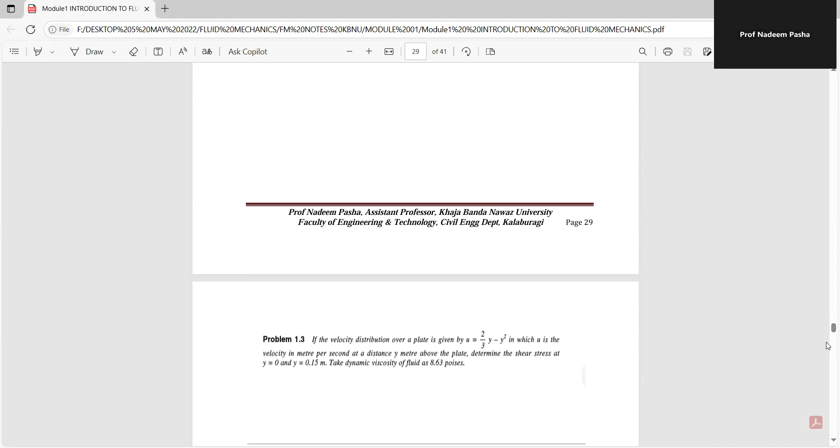The first problem is on Newton's law of viscosity. The velocity distribution over a plate is given by u equals 2/3 y minus y square, where u is the velocity in meter per second at a distance y meter above the plate. Determine the shear stress at y equal to 0 and y equal to 0.15 meter. Take dynamic viscosity of fluid as 8.63 poise.

So we are assuming the velocity distribution over a plate is given by u equals 2/3 y minus y square, where u is the velocity in meter per second at a distance y above the plate. We need to calculate the shear stress at y equal to 0 and y equal to 0.15 meter, taking dynamic viscosity of fluid as 8.63 poise.

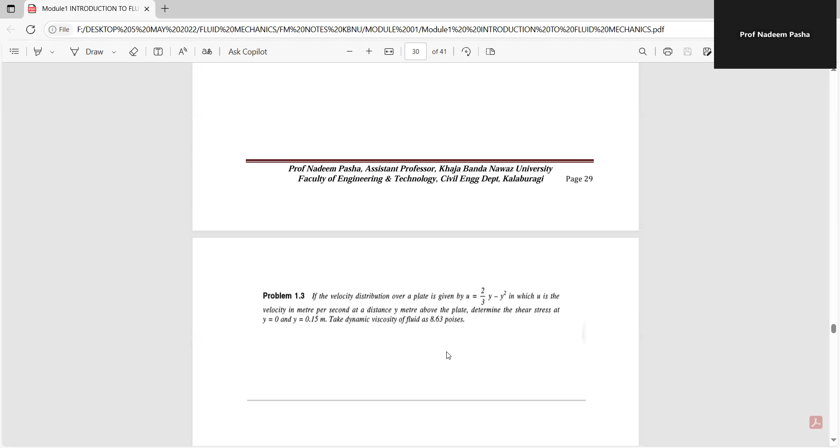So u equals 2/3 y minus y square. We need to differentiate this with respect to y. So du/dy equals 2/3 minus 2y, since differentiation of y is 1 and differentiation of y square is 2y. At y equal to 0, substituting 2/3 minus 2y as 0, it comes out to be 2/3 or 0.667.

In the second case, we calculate du/dy at y equal to 0.15 meter. 2/3 minus 2 into 0.15 comes out to be 0.367.

Now value of mu is given as 8.63 poise. To convert this to Newton second per meter square, multiply by 0.1, or divide by 10. So it comes out to be 0.863 Newton second per meter square.

Now the shear stress equation as per Newton's law of viscosity: shear stress acting on the fluid element is directly proportional to rate of change of shear strain. So tau equals mu into du/dy. In the first case, shear stress at y equal to 0 is given by tau-0 equals mu times du/dy at y equal to 0.

Mu is 0.863, and du/dy at y equal to 0 was calculated as 0.667. So the answer comes out to be 0.5756 Newton per meter square.

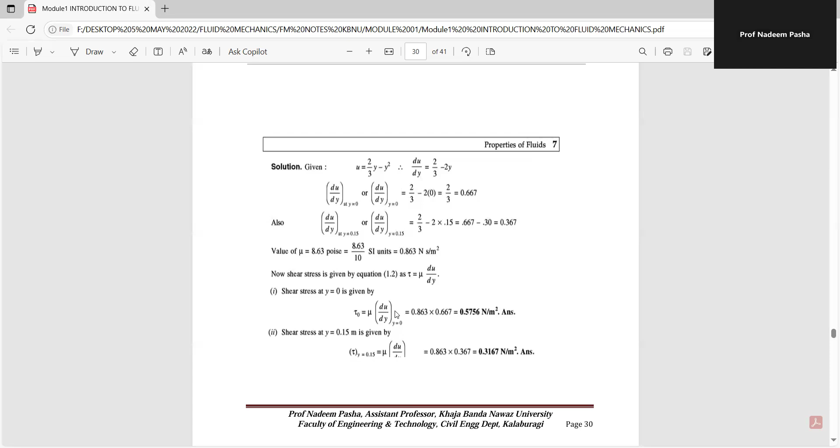One more problem: a plate 0.025 mm distant from a fixed plate moves at 60 centimeter per second and requires a force of 2 Newton per unit area, that is 2 Newton per meter square, to maintain this speed. Determine the fluid viscosity between the plates.

What is given to us? Distance between the plates, dy, is given as 0.025 mm. Velocity of the upper plate, U, required to move the plate is 60 centimeter per second, which converted to meter per second comes out to 0.6 meter per second. Now force on the upper plate is 2 Newton per meter square, which is the value of shear stress.

Now what we need to calculate is viscosity. So let the fluid viscosity between the plates be mu. Using the equation of Newton's law of viscosity, 2 equals mu into du/dy, where du equals change in velocity, u minus 0. Here the velocity is not changing, so du comes out to be 0.6 meter per second only. Similarly, dy is equal to change in distance.

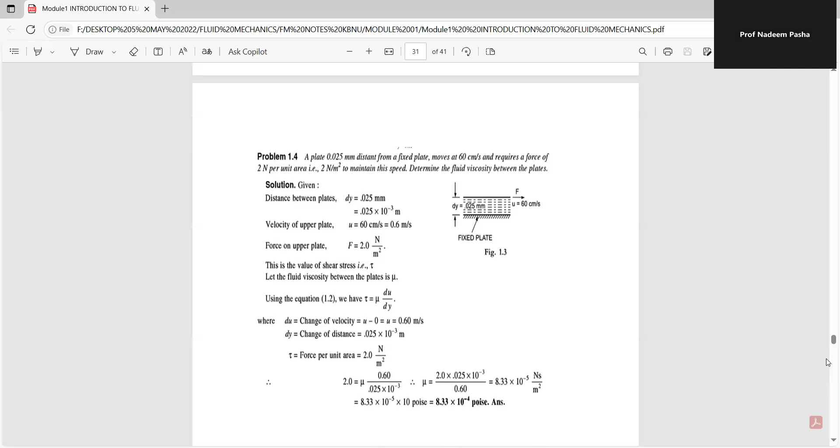So if you want to convert this into poise, it will be 8.33 into 10 raised to minus 4 poise.

So one more problem. Determine the specific gravity of a fluid having viscosity 0.05 poise and kinematic viscosity 0.035 Stokes. This is a somewhat new type of problem in which two types of viscosity is given: dynamic viscosity and kinematic viscosity. You need to calculate specific gravity.

Viscosity mu is equal to 0.05 poise, so it comes out to be 0.05 divided by 10 Newton second per meter square. Kinematic viscosity V is given as 0.035 Stokes. To convert this into meter square per second, multiply by 10 raised to minus 4. So kinematic viscosity comes out to be 0.035 into 10 raised to minus 4 meter square per second.

Now we have the relation V is equal to mu by rho. So V, the kinematic viscosity, is 0.035 into 10 raised to minus 4, equal to mu, 0.05 divided by 10, into 1 by rho. So your rho comes out to be 1428.5 kg per meter cube. This is a very interesting type of problem in which both types of viscosity are given, with the help of which you calculate the density and finally the specific gravity of liquid.

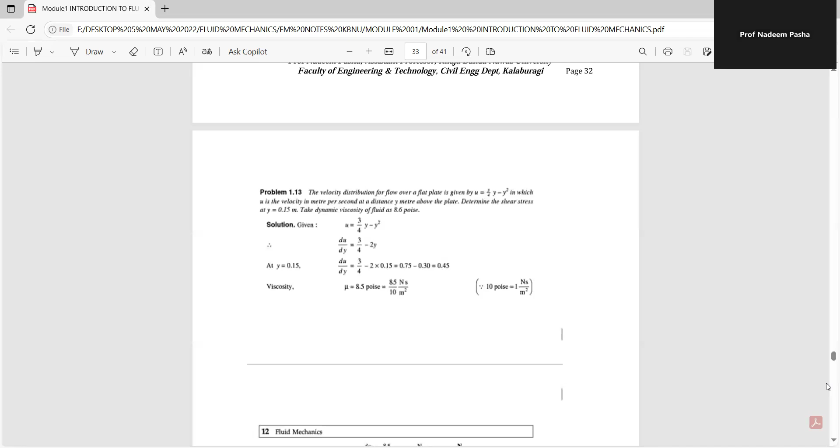Du by dy is equal to 3 by 4 minus 2y, since differentiation of y is 1 and differentiation of y square is 2y. At y equal to 0.15, du by dy equals 3 by 4 minus 2 into 0.15, which comes out to be 0.45. Mu is equal to 8.5 poise, or 8.5 Newton second per meter square divided by 10.

So shear stress is equal to mu into du by dy. So it is nothing but 8.5 by 10 into 0.45 Newton second per meter square, which finally comes out to be 0.3825 Newton per meter square.

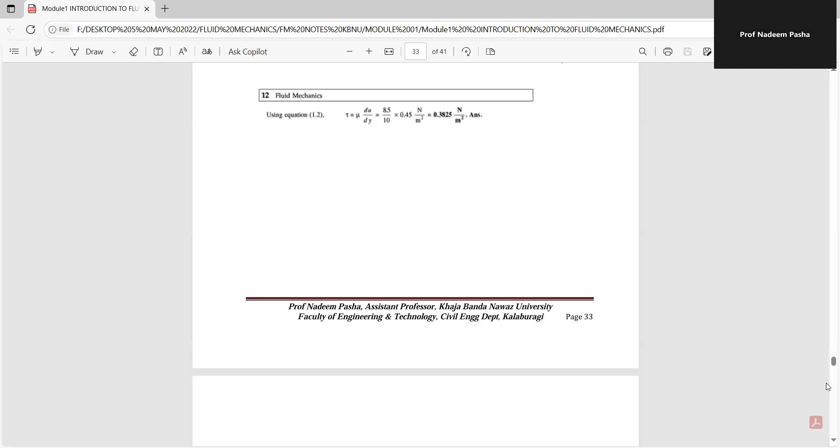Now we will solve some problems on viscosity of water only. We will just scroll through what problems are available. It's almost over, so we will solve that only.

The space between two square flat parallel plates is filled with oil. Each side of the plate is 60 centimeter. The thickness of the oil film is 12.5 mm. The upper plate which moves at 2.5 meter per second requires a force of 98.1 to maintain the speed.

Determine the dynamic viscosity of the oil in poise and kinematic viscosity of the oil in Stokes if the specific gravity of the oil is 0.95.

This is also a very interesting problem. Read it once again. What is happening? The space between two flat parallel plates is filled with oil.

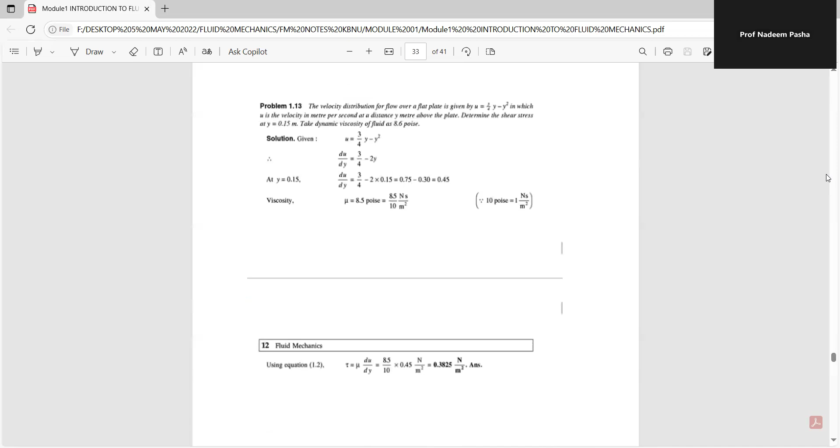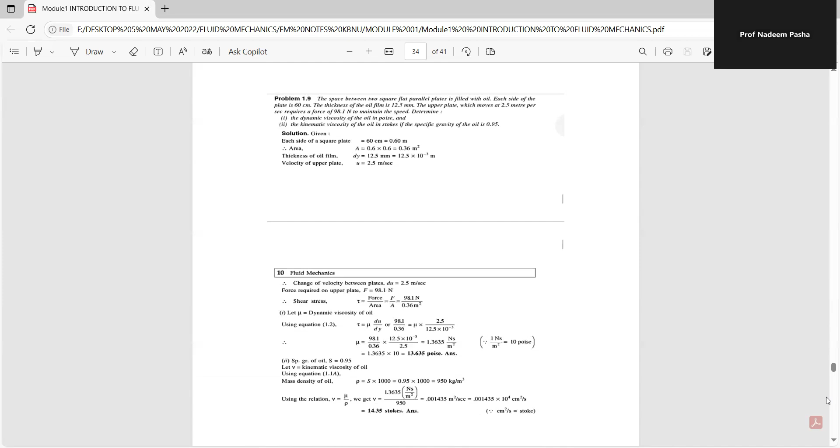This problem we already did. This also we did. No wait, this we need to calculate.

Find the kinematic viscosity of an oil having 981 kg per meter cube as the density. You need to calculate kinematic viscosity.

The shear stress at a point is given to us as 0.2452 Newton per square meter, and velocity gradient at that point is 0.2 per second. Velocity gradient du by dy is given to us as 0.2 per second. Mass density rho is nothing but 981 kg per meter cube. Shear stress tau is equal to 0.2452.

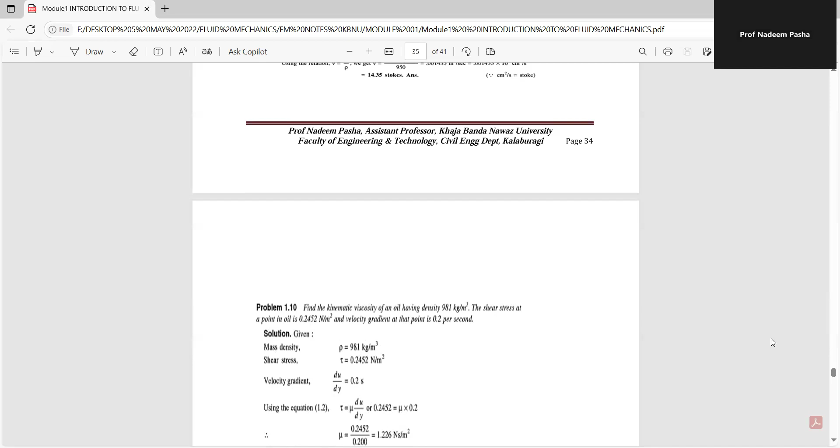Using the equation tau is equal to mu into du by dy, or tau is 0.2452 equal to mu into du by dy which is 0.2. So mu comes out to be 1.226 Newton second per meter square.

Now kinematic viscosity V is given by V equal to mu by rho. So nu is 1.226 divided by rho which is 981. So it comes out to be 0.125 into 10 raised to minus 2 meter square per second.

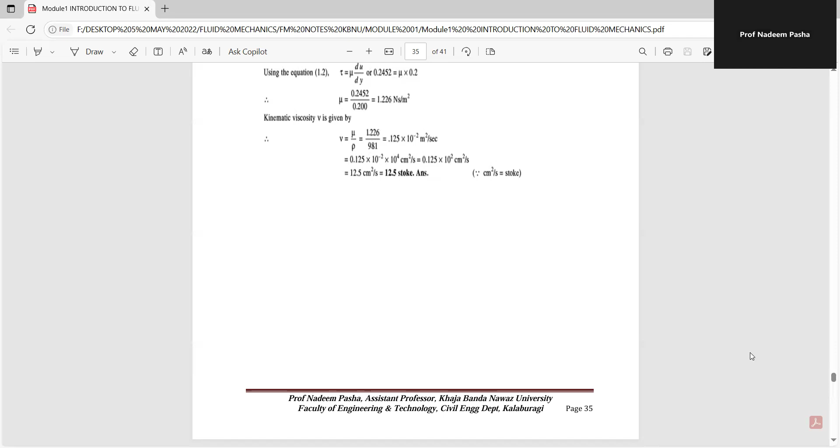So it comes out to be 12.5 centimeter square per second, or Stokes, because centimeter square per second is equal to Stokes. This almost completes our first module. If you have any doubt, you can comment on the videos. If not, we will go to the next module.

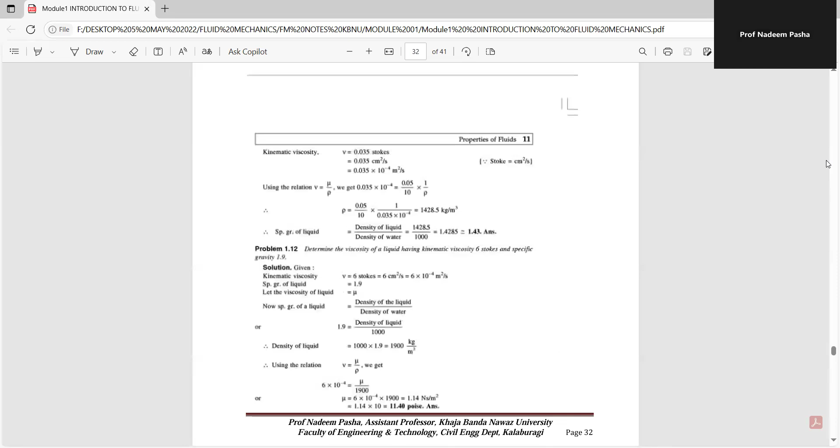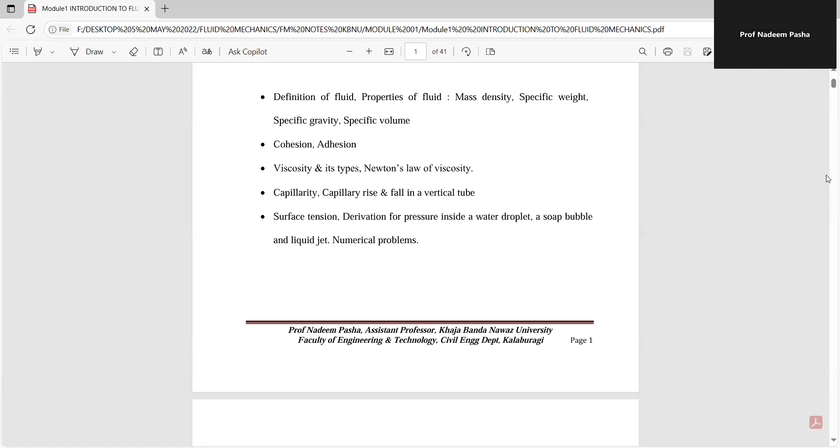I will just recall the things from the starting. So our module 1 started with definition of fluid, properties of fluid, mass density, specific weight, specific gravity, specific volume. Later on, we calculated cohesion and adhesion. Next, we calculated viscosity and its types, Newton's law of viscosity. Next, capillarity, capillary rise and fall in the vertical tube. Finally, we studied about surface tension, in case of water droplets, soap bubble, and liquid jet. Also, we solved numerical problems.

So, what exactly is a fluid? A fluid is a substance which undergoes continuous deformation under the application of loads.

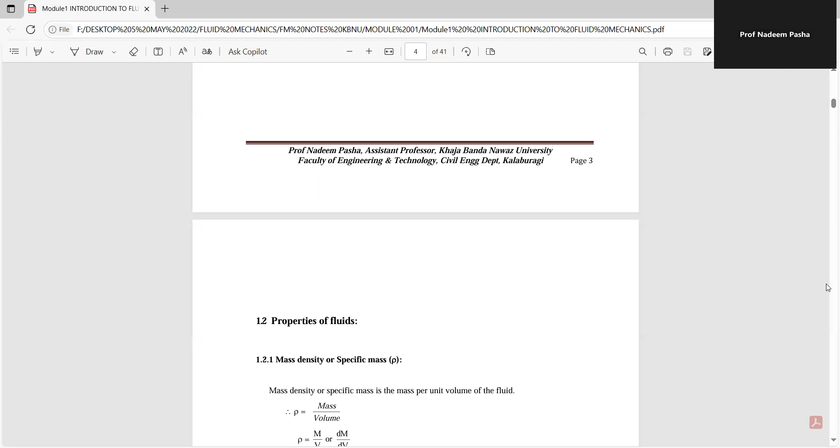Next, properties of fluid: density, nothing but mass by volume. SI unit is kg per meter cube. Weight density is weight by volume, SI unit is Newton per meter cube. W is equal to mg, that is weight is equal to mass into acceleration due to gravity. Specific gravity or relative density is nothing but density of fluid divided by density of standard fluid. This was a very important definition, as it was helpful while solving the problems.

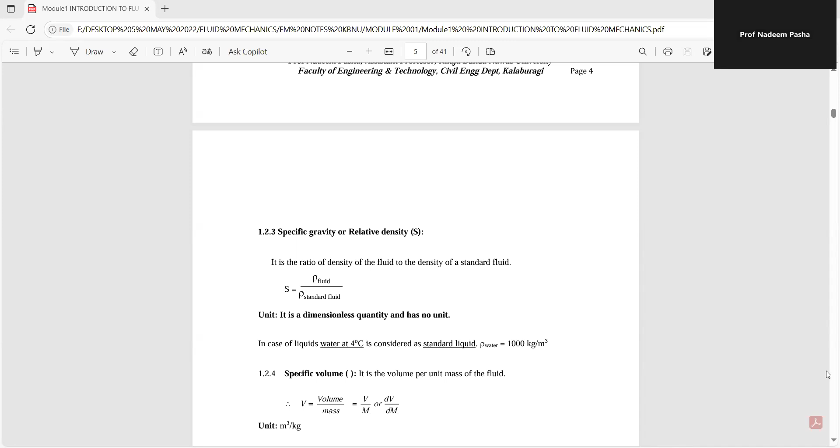We studied about specific gravity. So what was specific gravity? It is nothing but ratio of density of fluid to density of standard fluid. Standard fluid, we assume water to be standard fluid, whose density was 1000 kg per meter cube. Next, it is a dimensionless quantity. Specific volume is nothing but ratio of volume to mass, its unit is meter cube per kg. After that, we solved some problems on this.

Next, cohesion and adhesion we studied. Cohesion is nothing but force acting between molecules of same kind, whereas adhesion is nothing but force acting between molecules of different kind.

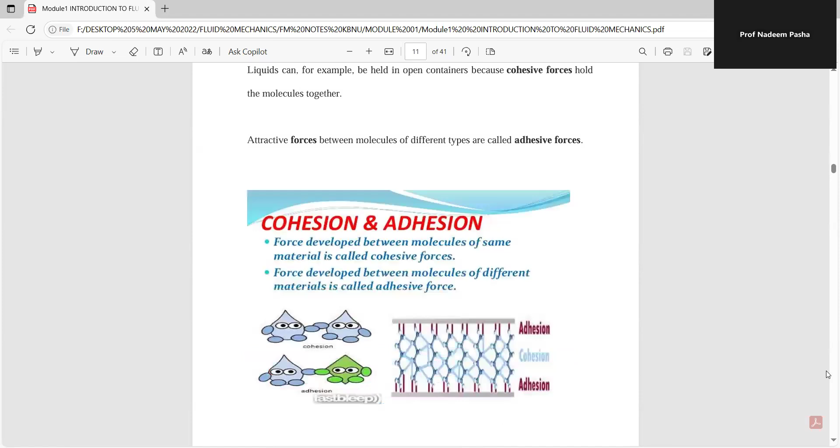Then we studied examples for surface tension. Cohesive force: for instance, rain falls in droplets rather than a fine mist because water has strong cohesion which pulls its molecules tightly together, forming droplets. So during rainy season, if you have observed, when water droplets fall on a leaf, they will stick to it due to the adhesive force between the molecules.

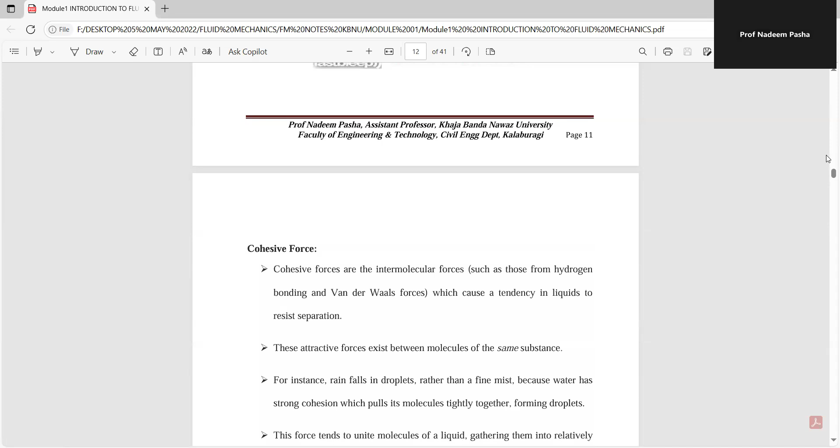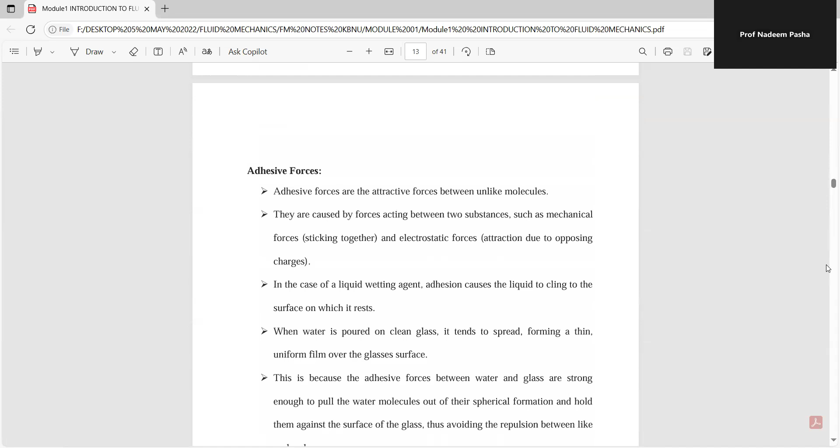Similarly, example for adhesive forces, that is force acting between molecules of unlike kinds. When water is poured on a clean glass, it tends to spread, forming a thin uniform film over the glass surface. This is due to the unlike force acting between them.

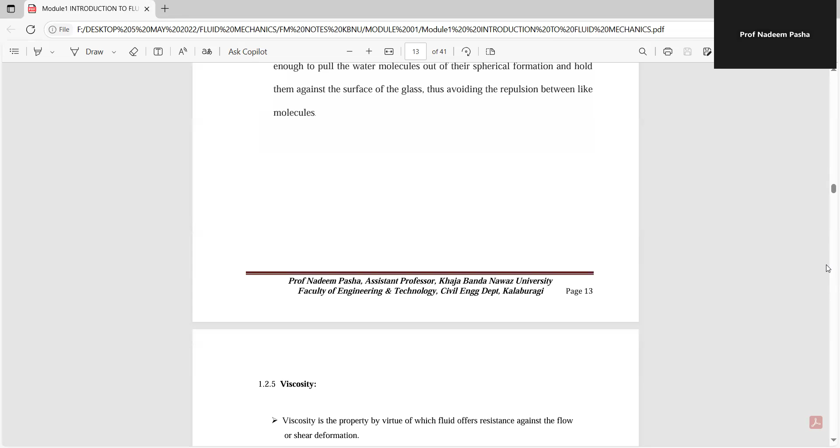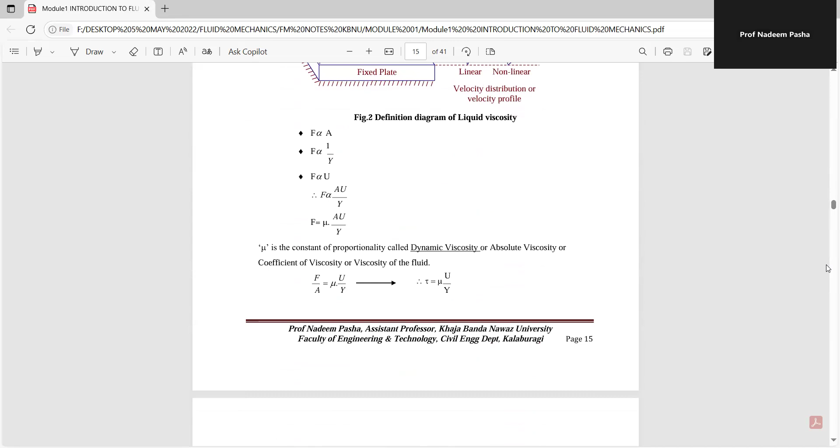Then we studied about viscosity. Viscosity is nothing but the property of a fluid by virtue of which one layer of the fluid opposes the flow of another layer. Then we studied Newton's law of viscosity, which said that shear stress acting on the fluid element is directly proportional to shear strain. Tau is equal to mu into du by dy, where mu is known as dynamic viscosity or coefficient of viscosity. Its unit is Poise and Newton second per meter square.

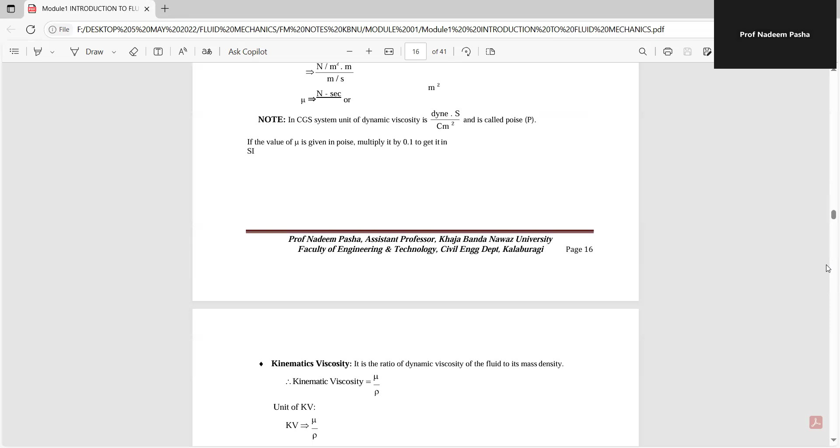Next is kinematic viscosity. It is the ratio of dynamic viscosity of the fluid to the density of the fluid, so its unit is meter square per second. Then we solved some numericals on viscosity.

And then we studied about different types of fluid: ideal fluid, real fluid, Newtonian fluid, non-Newtonian fluid, and ideal plastic fluid. So ideal fluid is nothing but a fluid which has no viscosity and it is incompressible. Although such type of fluid does not exist, we assume it for our study or research purpose.

Next comes real fluid. Almost all the fluids which are available are nothing but real fluids only. Whereas Newtonian fluid is nothing but a fluid which obeys Newton's law of viscosity, that is shear stress is directly proportional to shear strain. Next type of fluid is non-Newtonian fluid, which does not obey Newton's law of viscosity.

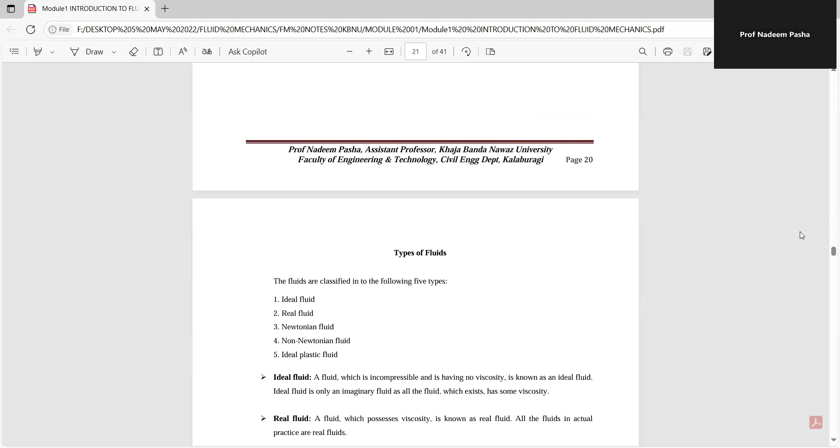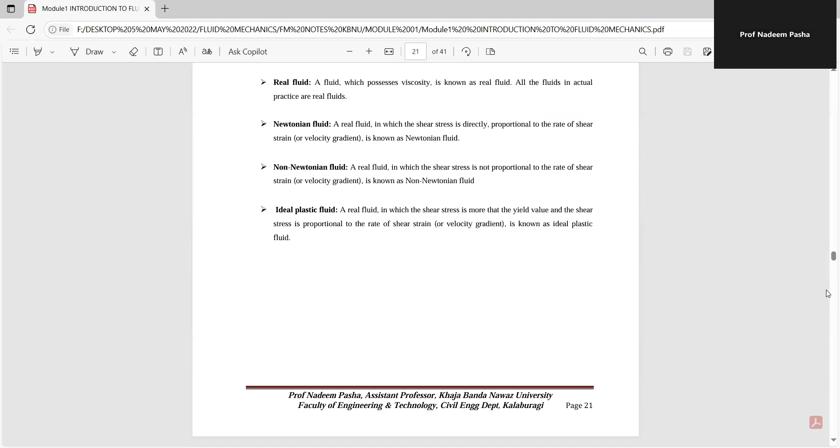Last but not the least, ideal plastic fluid. It is nothing but a real fluid in which the shear stress is more than the yield stress, and the shear stress is proportional to the rate of change of shear strain or velocity gradient.

Next, we studied about surface tension. So, what is surface tension? It is nothing but tensile force acting on the surface of a liquid in contact with gas, or in between two immiscible liquids - liquids which cannot be mixed. For example, water and petrol. If you mix them, then in between them there will be a thin film formed. So these type of fluids are termed as immiscible liquids.

So what is the SI unit of surface tension? Newton per meter. So how are we explaining surface tension to the student?

We are assuming that three bubbles are inserted in water. Bubble A is completely inserted in water, as a result of which all the forces are acting on it, and the resultant force acting on it will be zero.

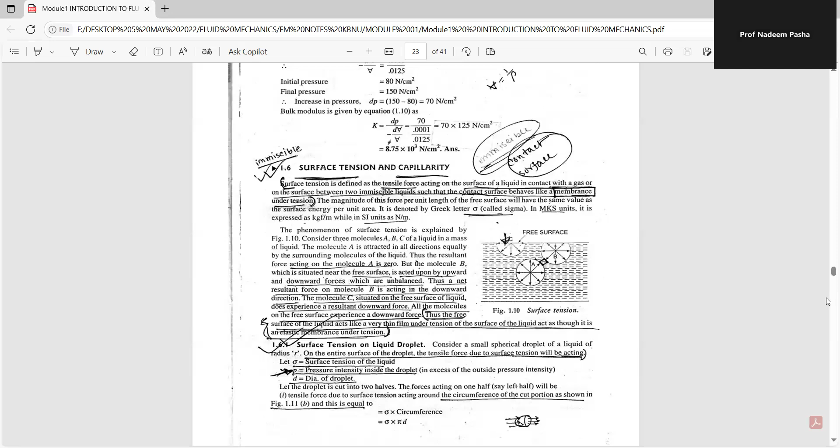The unit for surface tension is Newton per meter. After that, we calculated surface tension of liquid droplet, assuming the forces to be in equilibrium. So it comes out to be sigma equal to PD by 4.

Similarly, we calculated surface tension of hollow bubble, as both surfaces are in contact with air. It comes out to be P equal to 8 sigma by D, or sigma, surface tension, equal to PD by 8. Finally, we calculated surface tension of liquid jet. It comes out to be sigma equal to PD by 2.

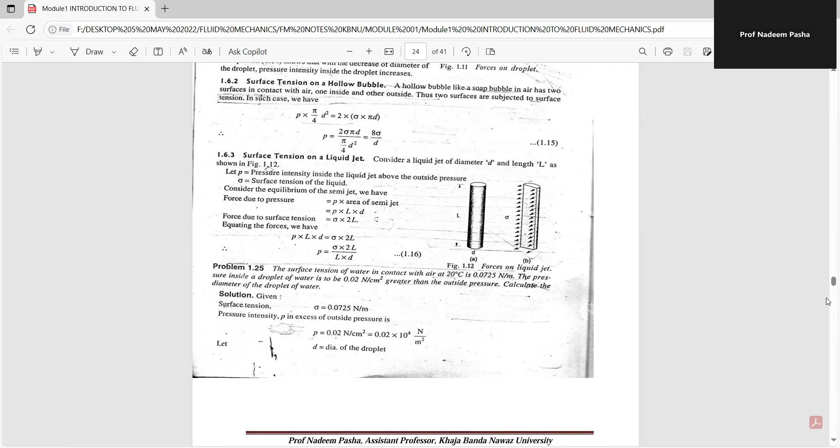So PD by 4, PD by 8, and PD by 2 is the surface tension for different cases: bubble, hollow bubble, liquid droplet, or liquid jet. Finally, we come to the last part of module 1, that is capillarity.

What was capillarity? Capillarity is nothing but the sudden rise or fall in the level of liquid when a glass tube is inserted in a beaker. There will be a rise in the level of liquid adjacent to the layer, or there will be a decrease in the level. If there is an increase, then it is termed as capillary rise.

And the formula to calculate capillary rise is H equal to 4 sigma cos theta divided by rho GD, where theta is equal to 0 degree in case of water, whereas theta is equal to 120 degree in case of mercury.

So how will you define capillary fall? Capillary fall is nothing but the reduction and fall in the level of water in the glass tube when it is inserted in it.

Normally, capillary fall is observed in case of mercury whose density is more, that is 13.6 into 1000, which comes out to be almost 13600 kg per meter cube. Capillary fall is identified by the negative sign.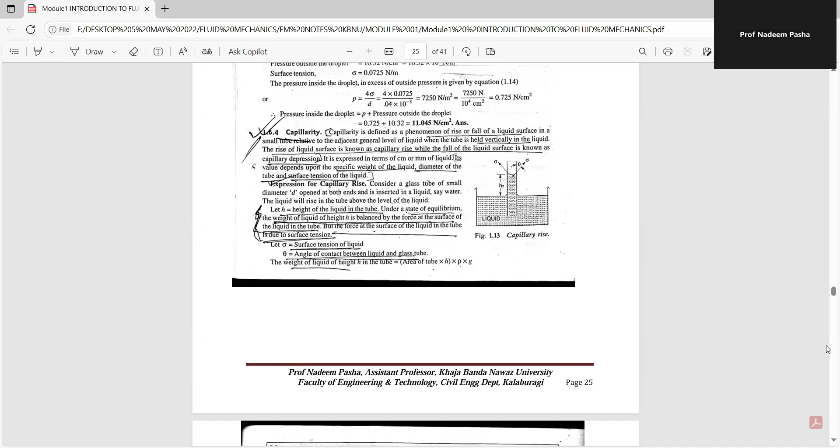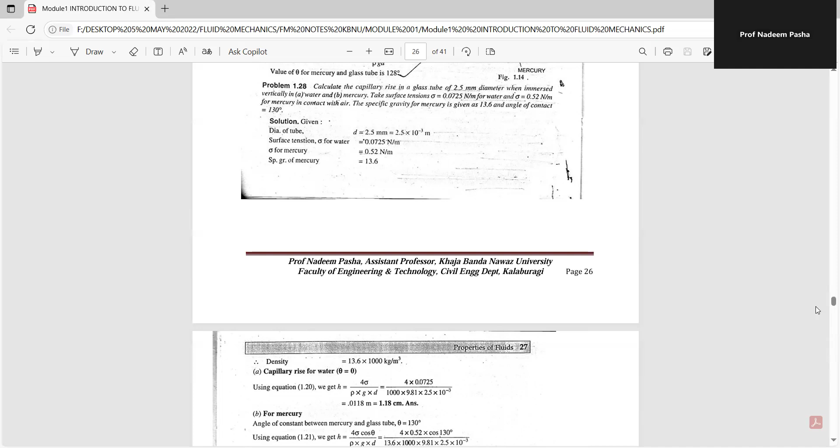So after that, we calculated some problems for capillary rise and capillary fall, assuming that diameter is given by d, and h is equal to 4 sigma cos theta divided by rho g d. Using both formulas, we calculated the problems or we solved the problems.

It is a very simple and easy problem, but don't get confused or else you will lose marks. So h is equal to 4 sigma cos theta divided by rho GD. For capillary rise, theta is equal to 0, so cos 0 is almost equal to 1, so your h becomes 4 sigma by rho GD.

In case of mercury, theta is equal to 128 or 130 degree. So h equal to 4 sigma cos 128 or 130 divided by rho GD. So you will get the desired value.

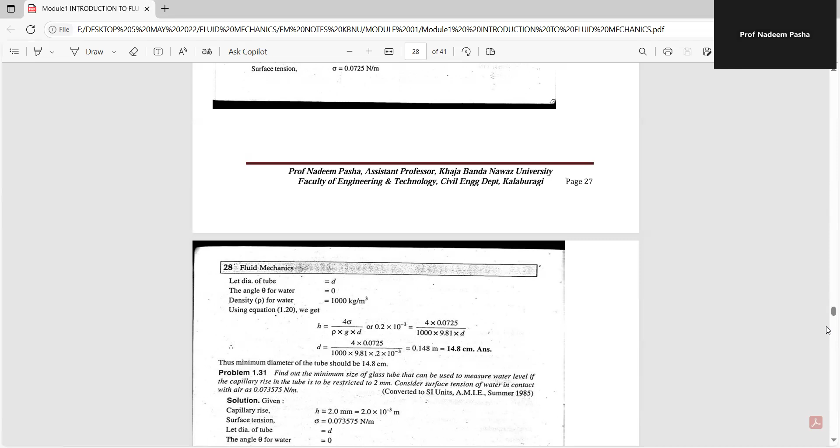The negative sign indicates there is a capillary fall in the tube. So carefully take the instruments, carefully handle it, don't get confused. It is a very important module 1 because the entire physics is dependent on this topic. If you are unable to understand this topic, then you cannot understand anything.

So just try to remember the definition of fluid, the properties of fluid, density of fluid, specific weight, weight density, specific gravity. If you remember all these things, then you can easily solve the problems and also appear in the exam.

Density is mass by volume, specific weight is weight by volume, specific volume is volume by mass. So this type of things you can easily calculate.

Next, surface tension unit is Newton per meter. Capillarity unit is meter or centimeter. H is equal to 4 sigma cos theta by rho GD.

Next, other than this, there is viscosity, kinematic viscosity, dynamic viscosity, and shear stress is directly proportional to shear strain. So all these things will be helpful.